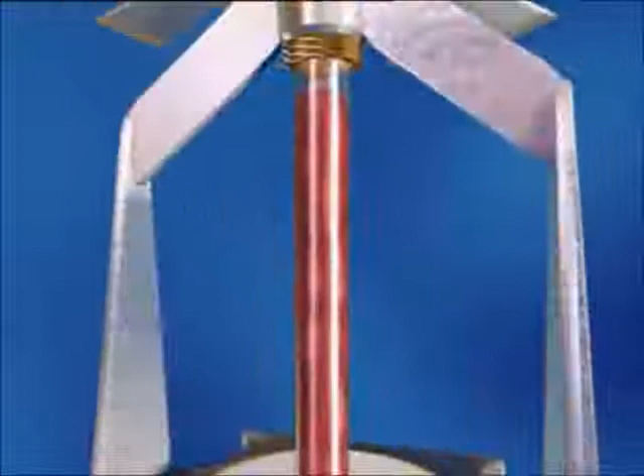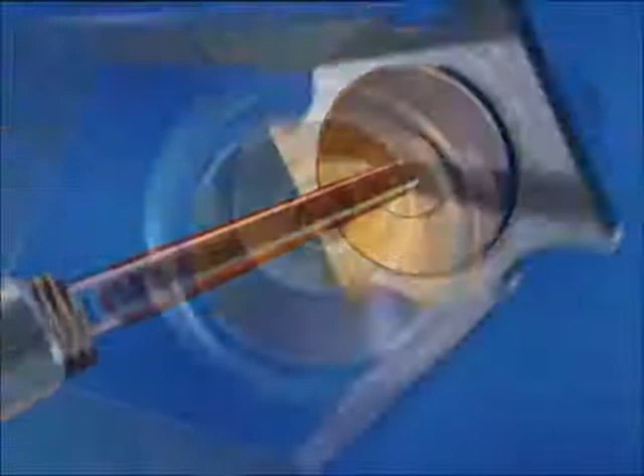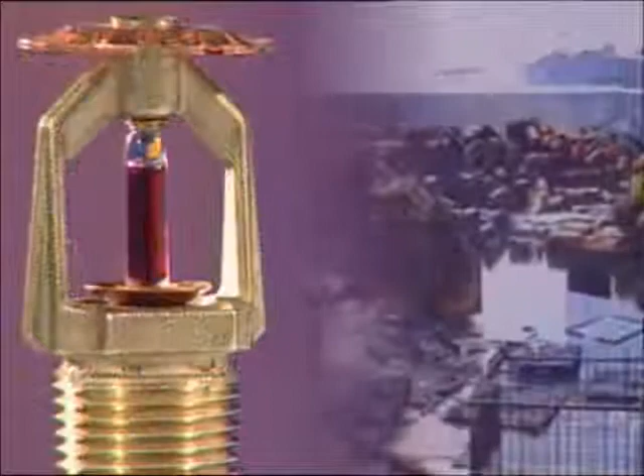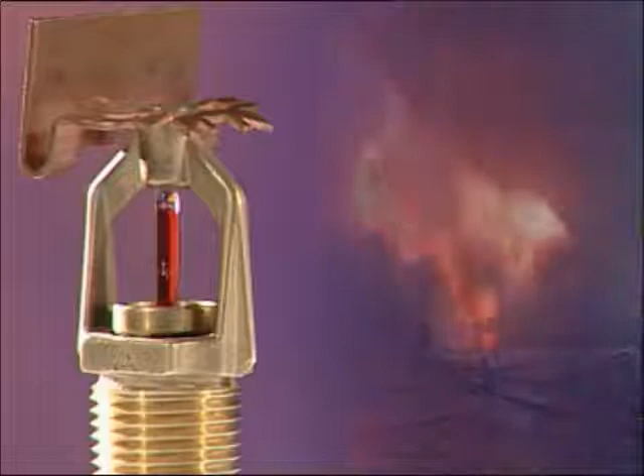Fire sprinkler systems were invented over 120 years ago. Since then, several hundred million sprinkler heads have been installed throughout the world. In that time, they've effectively protected thousands of buildings, helped to prevent the financial collapse of numerous businesses, saved countless lives, prevented innumerable burn injuries, and protected the environment from catastrophic fire-related pollution. They're universally acknowledged as the most effective first line of attack against fire.

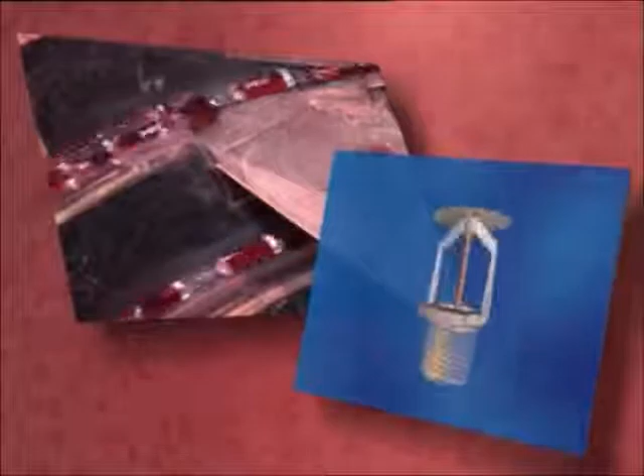The world's first rules for the design and installation of automatic fire sprinklers were written in the UK by John Wormald in 1885. Fire sprinkler systems in the UK are generally designed in accordance with British Standard 5306 Part 2 and, in some instances, Loss Prevention Council (LPC) rules for automatic sprinklers. American rules may sometimes be used, being Factory Mutual or National Fire Protection Association.

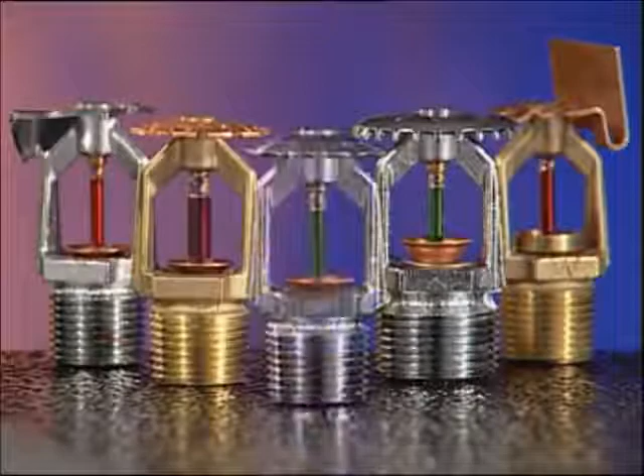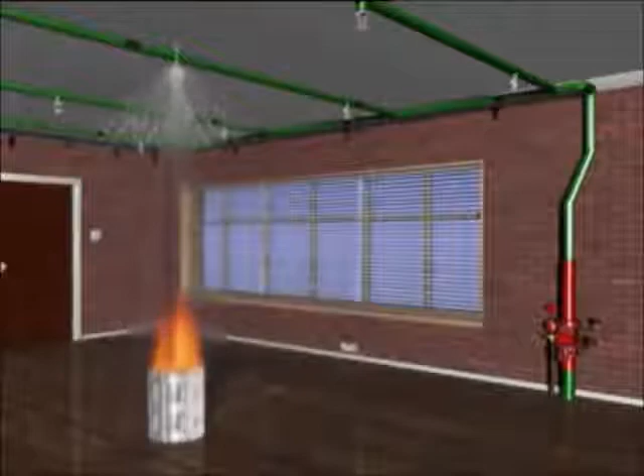Sprinklers are designed to cope with the fire risk presented by each individual building and may also be specifically configured to save lives. Water still remains the most effective firefighting medium available. Sprinklers will deliver water right into the heart of a fire during its early stages through a specially designed sprinkler head. Sprinkler heads are unique. They automatically detect a fire, discharge water right into the seat of the blaze, and operate a local alarm. They can also operate a remote alarm to alert the fire brigade or other emergency centre.

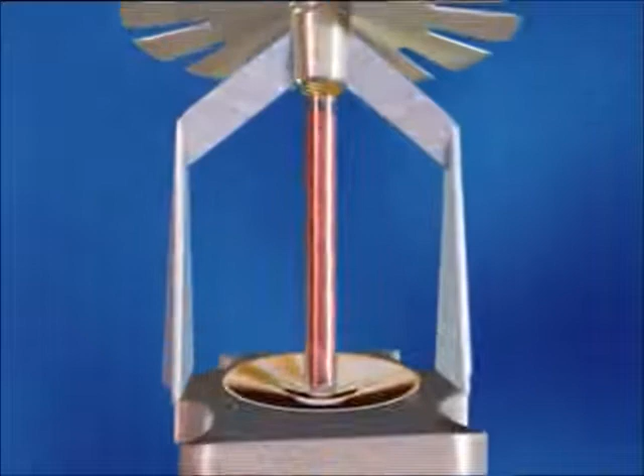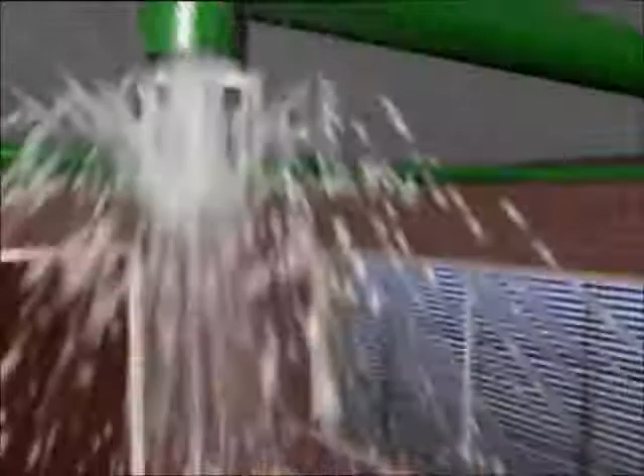A typical sprinkler head comprises a threaded body to connect to pipework, with a valve seal to hold back the water. The valve seal is retained by a glass bulb which contains a liquid that has a high coefficient of expansion. A small measured quantity of vapor remains trapped when the bulb is hermetically sealed. When the liquid expands under the influence of heat from a fire, pressure in the bulb rises until the vapor is compressed. Further increases in temperature cause a rapid build-up of pressure sufficient to shatter the bulb, releasing the valve seal and allowing the water to flow onto a water distribution deflector. This results in an even distribution of water droplets in a predetermined pattern over the fire.

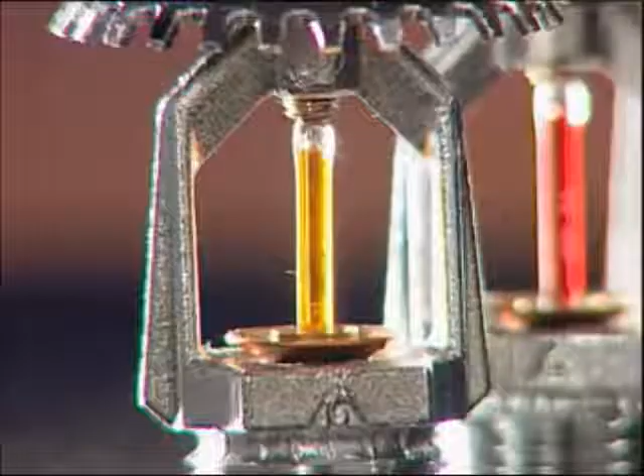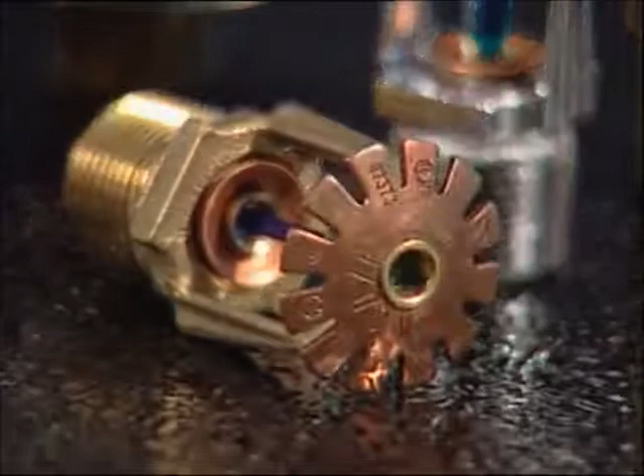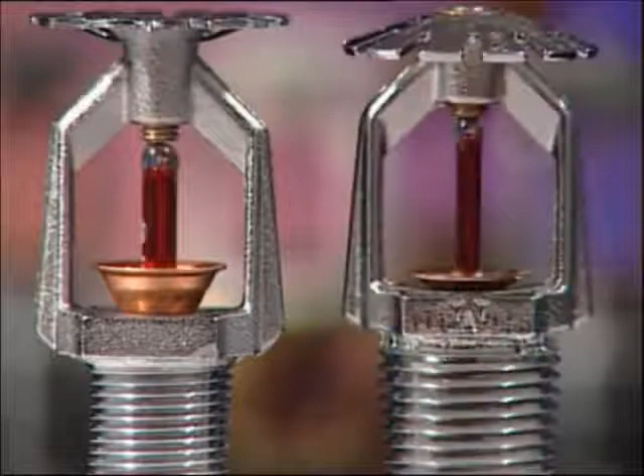Sprinkler heads are available in a variety of operating temperatures, which are identified by the color of the bulb. The specifier has a vast array of sprinkler heads available to him. Each type of head is designed to cope with different fire risks, different operating temperatures, and different operational requirements. The British Standard defines fire risks as light hazard, ordinary hazard, or extra high hazard. Generally, as the hazard increases, so does the water discharge or density discharge.

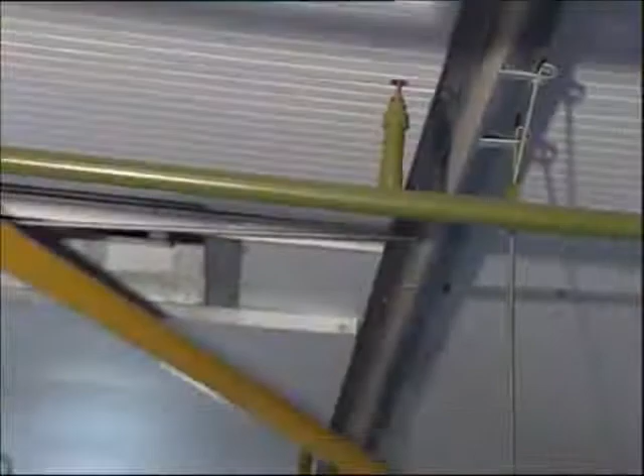Conventional sprinklers can be mounted in either the upright or pendant position, with a deflector designed to spray a proportion of the water discharged onto the surface of the ceiling. Spray sprinklers in upright or pendant positions are used for applications where all the water needs to be discharged downwards. Sidewall sprinklers are primarily used to keep ceilings clear of pipework for aesthetic reasons or to avoid having to disturb existing ceilings when installing. Each sprinkler protects up to 17 square meters in light hazard fire risks and 9 square meters in ordinary hazard fire risks.

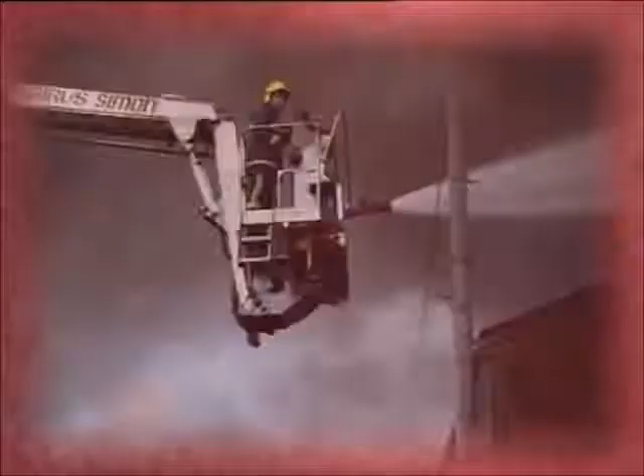Sidewall sprinklers with extended coverage are specifically designed to give an extended coverage of water distribution, with one sprinkler able to protect an area of up to 21 square meters. This type of sprinkler must have a quick response bulb. In a fire, few deaths result from direct contact with flames. The greatest threat comes from inhalation of the products of combustion, such as carbon monoxide, hydrogen cyanide, hydrogen chloride, other toxic gases, and the associated heat.

The reaction time of quick response sprinklers minimizes the life-threatening levels of toxic gases and temperatures. In many environments, there are people who cannot escape without assistance, such as in hospitals or homes for the elderly. Quick response sprinklers provide valuable time for those in charge to assist their escape.

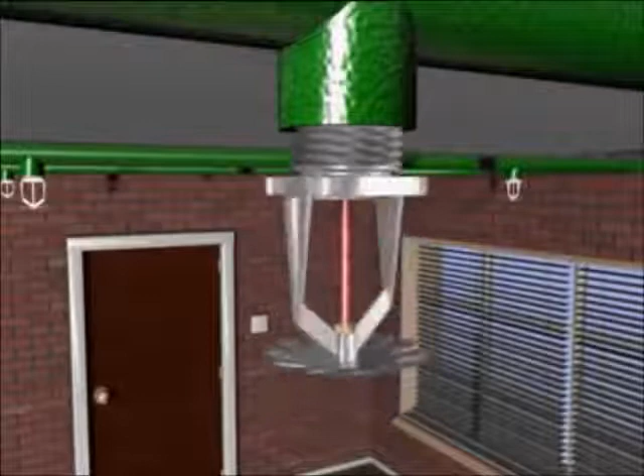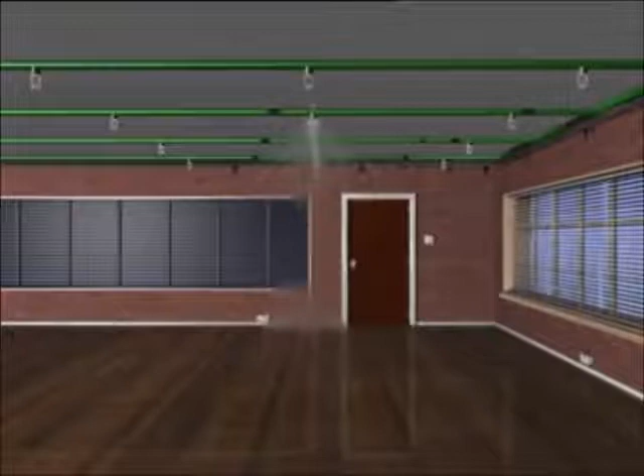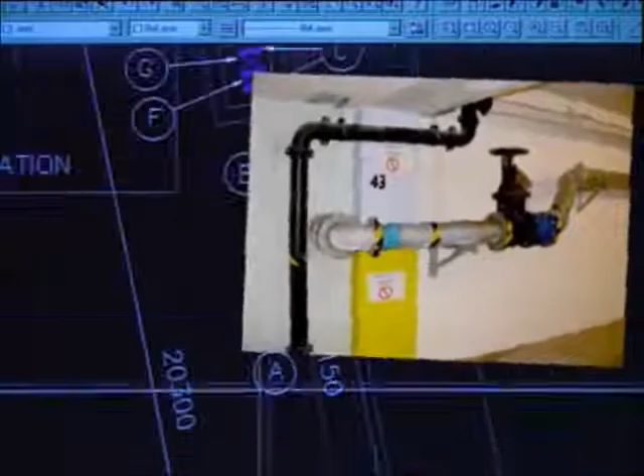A sprinkler head is connected to a water supply via a network of pipes fed throughout the building. The area protected by each sprinkler head can vary from 9 square meters to 21 square meters depending on the fire risk. The pipework is hydraulically designed to ensure the correct flow and pressure of water is maintained at each sprinkler head. The water supply to the system can be fed from the town main for light to medium fire risks, such as residential, offices, hotels, and light manufacturing and commercial occupancies. For high fire risk areas, such as heavy manufacturing and warehouse storage, a pumped supply from a water storage tank or reservoir is normally necessary.

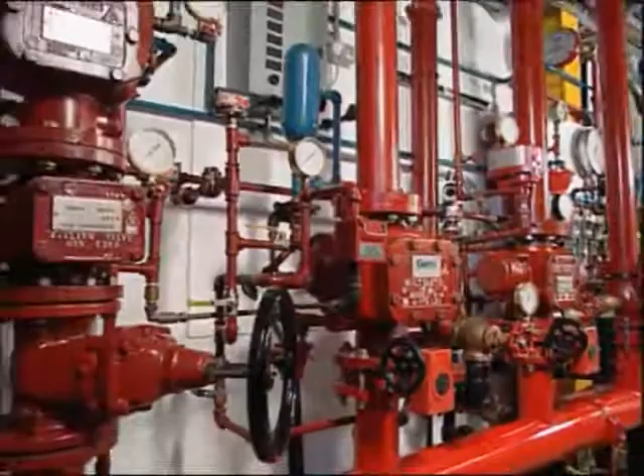The design requirements are specified in the British Standard BS 5306 Part 2 and LPC FM or NFPA design rules. A control and alarm valve automatically delivers the flow of water to the sprinkler heads. There are generally 5 types of sprinkler system that all require different valve arrangements.

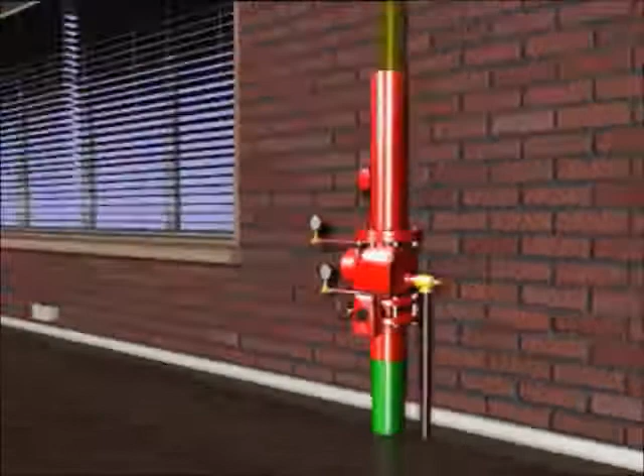A wet system is where the pipework is permanently charged with water and used to protect premises where temperatures are unlikely to fall below freezing point. Where the ambient temperature may fall or be below freezing point, the presence of static water in the sprinkler pipes is clearly undesirable. In this situation, a dry system can be installed in which the pipework is charged with compressed air. When a sprinkler operates, the compressed air is released and the control valve opens, allowing water to flow into the pipework and to discharge from the operated sprinkler heads.

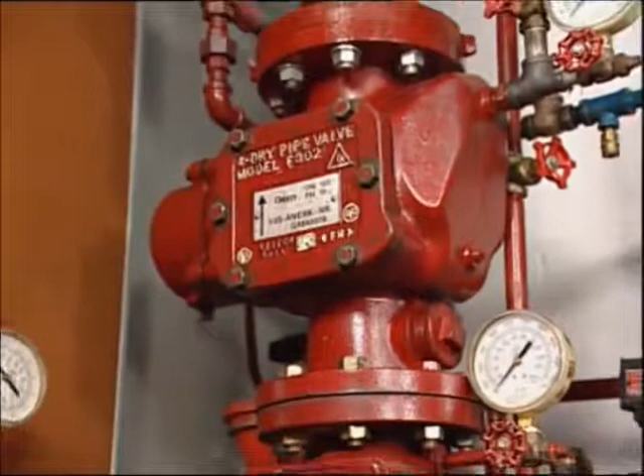An alternate wet and dry system, as the name implies, allows the system pipework to be alternately charged with water in summer and with air in winter, when there is a risk that the ambient room temperature can fall below freezing.

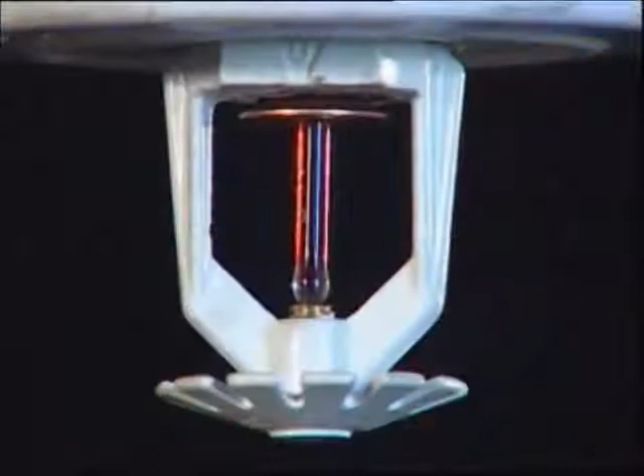Pre-action systems are comprised of a standard sprinkler system and an independent electrical system of heat or smoke detectors installed in the same areas as the sprinklers. On receipt of a signal from 2 or more detectors, the main control panel automatically opens the control valve, allowing water to flow into the sprinkler pipework. Water is only discharged when the individual sprinkler heads reach their operating temperature. Any physical damage to a sprinkler in a non-fire situation will not result in water discharge, but will cause both visual and audible alarms to be raised at the main control panel only.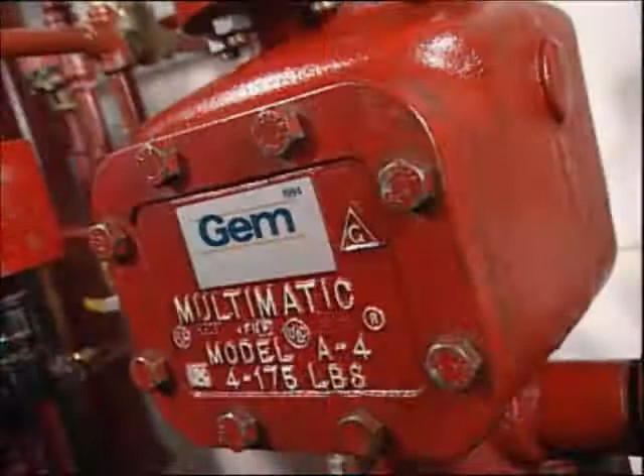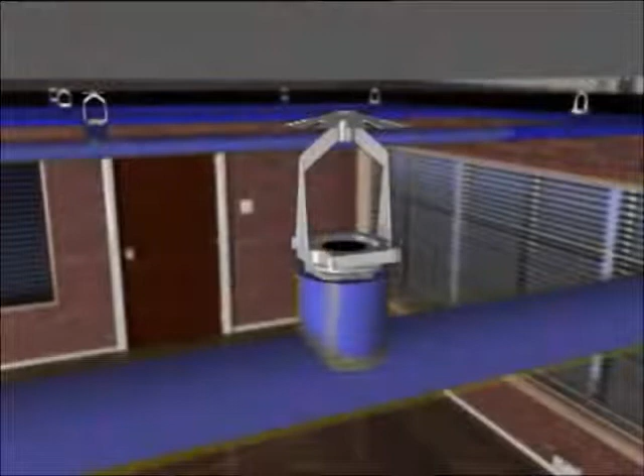A deluge system, unlike any other typical sprinkler system, is designed specifically for high-hazard applications with fast fire growth potential. The deluge valve is actuated by a separate detection system responding to a fire. This brings a large number of open sprinklers into action simultaneously throughout the protected area.

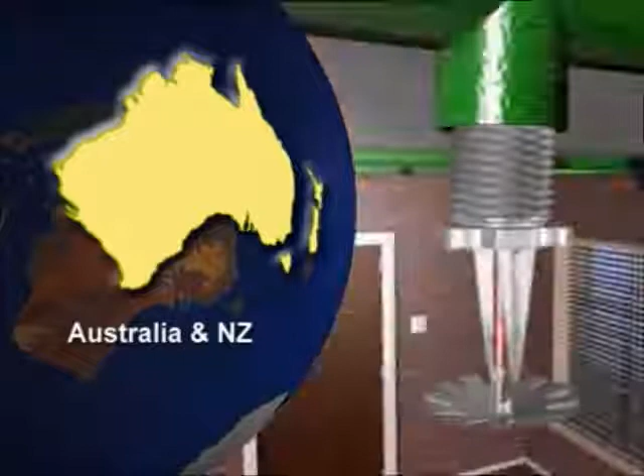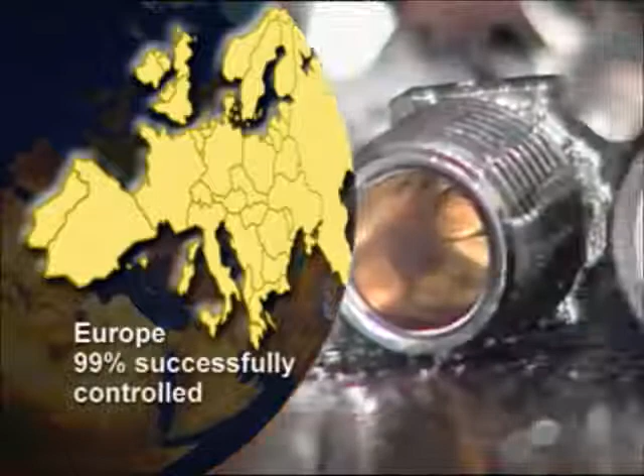The successful performance of sprinkler systems has been detailed in records from across the world, paying testament to their outstanding reliability and effectiveness. In Australia and New Zealand, where it's a requirement that all fires must be reported, records reveal that over a 100-year period, sprinklers successfully controlled 99.5% of fires in sprinklered premises. Statistics collated in Europe over the last decade are remarkably similar, showing that in fully sprinklered premises, 99% of all fires have been controlled by the sprinkler system.

The reason sprinklers are so effective is because they attack the seat of the fire before it has time to grow and spread. There's no excessive use of water. In Germany, for example, 86% of fires in sprinklered locations have been controlled by 5 or fewer heads. In the UK, it's reported that of the fires in sprinkler-protected buildings over a 10-year period, almost half were controlled by 1 or 2 sprinkler heads only.

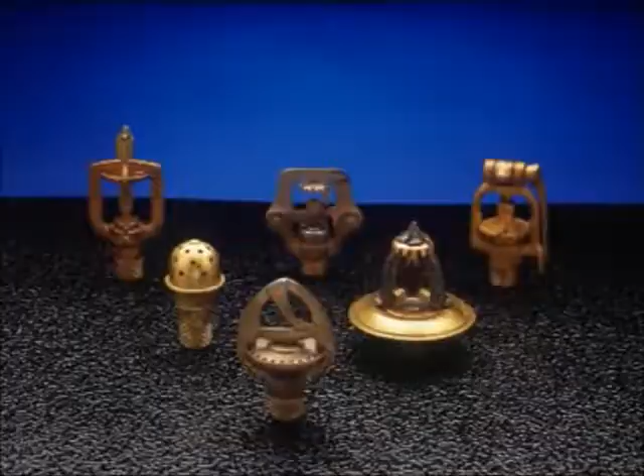Fire brigades, local government authorities and politicians alike have all seized upon these statistics. This has generated numerous campaigns for sprinklers to be installed in applications that could only ever have been dreamt about when sprinklers were first commercially launched over 120 years ago. That's because sprinklers are unique. They not only detect a fire and raise an alarm, they operate to control it and in many cases extinguish the fire before the arrival of the fire brigade. Only the sprinkler heads closest to the fire operate.

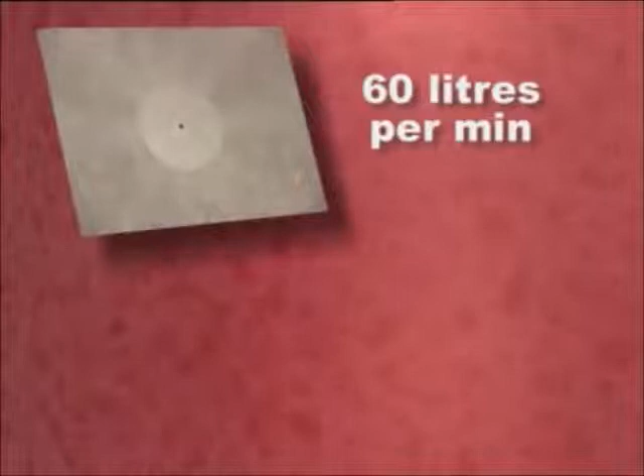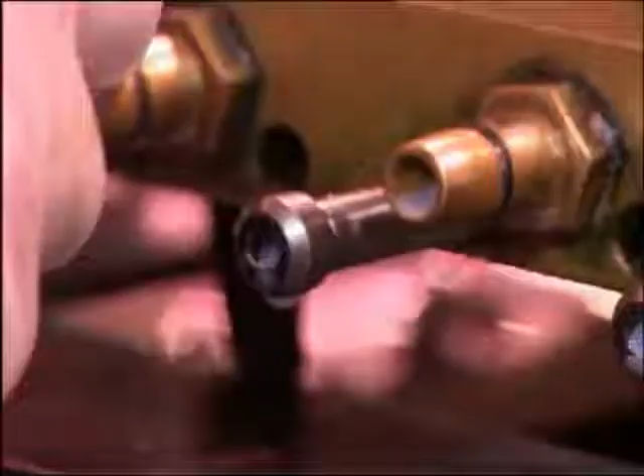Water is discharged by a sprinkler directly onto a fire at a rate of a minimum of 60 litres per minute, in comparison with an unsprinklered building where the fire brigade using only 1 fire hose could discharge 500 litres per minute. The fire will also be much larger as it will have grown for at least 10 minutes before the fire brigade arrive, so the likelihood is that more than one hose would be used. Worldwide research shows that of the 40 million sprinklers installed every year, only 2 may operate accidentally. This is because every head is individually tested before leaving the manufacturer.

Sprinklers are economical to install. For example, in the case of office blocks and hotels, the sprinkler system would cost about the same to install as a quality carpet for the equivalent area. Sprinkler systems will have a lifespan of at least 25 years, probably 50 years. Some systems are still in use today that are over 120 years old.

The threat from fire will never change. It will always be with us, endangering life, property, and the environment we live in. Fire sprinklers will protect us and future generations. Fire sprinklers. Protection for life.